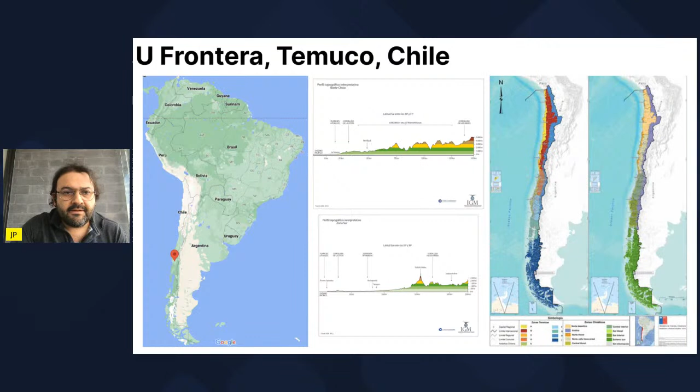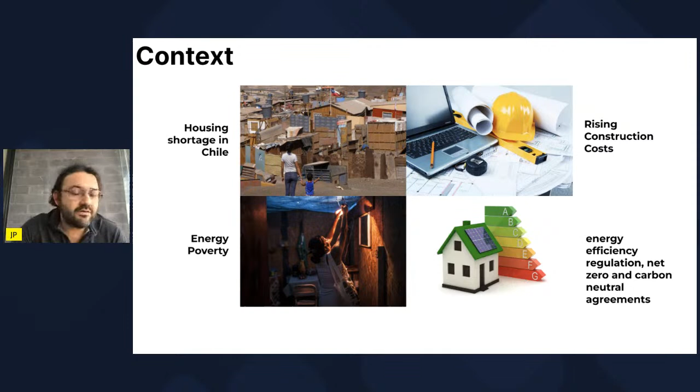Here, as a general context, we have several problems associated with the residential sector, such as the housing shortage, the rising cost of construction materials, and the problem similar to other countries with energy poverty, which must be combined with new energy efficiency standards and some agreements that the country has made regarding net zero and carbon neutrality.

So our proposed solution in this context is our approach has been to move towards industrialization by making use of digital manufacturing, but with a focus on low environmental impact systems and materials. Using our experience in the development of insulation materials with low environmental impact, and the use of vernacular construction techniques, but in a context of digitalization of construction 4.0, you know, sustainable construction 4.0. That is the mix of these two big concepts.

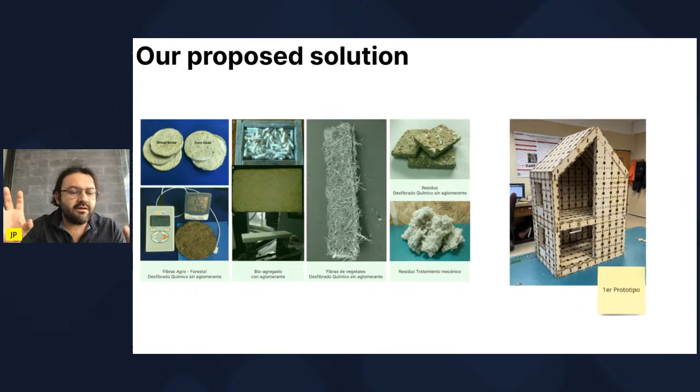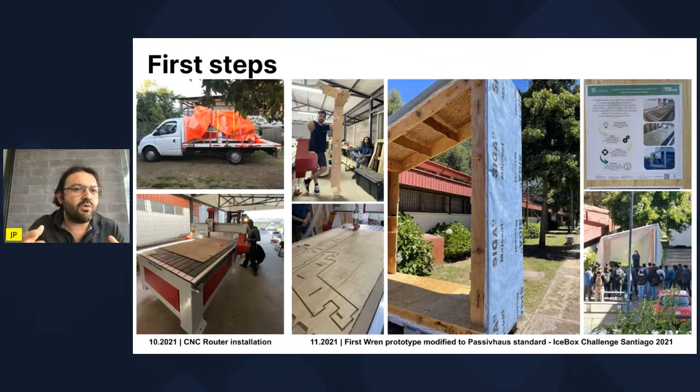So our first steps, a little over a year ago, we bought a generic CNC router, and our first experience with WikiHouse was a section of the Wren system that we modified to comply with the U-value of the passive house standard. This was in the context of the Santiago Icebox Challenge in 2021. Here you can see the pictures, the module, the blocks, and we use this module at real scale for students to show what is this mix of these big concepts.

We found the Wren system very interesting. However, we found that it didn't make good use of the plywood boards, leaving a lot of waste. For this reason, we began to experiment with the development of a system that would make the best use of the plywood board. In addition, due to cost issues, we tried to combine OSB and plywood boards. Everything was working very well, but the joints were an issue that we needed to study in more detail.

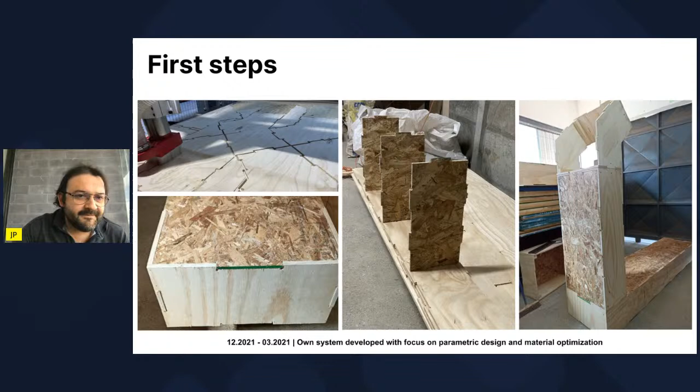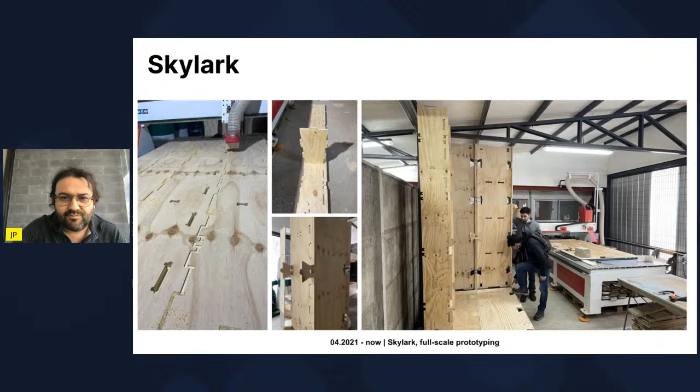At that point, I went back to the WikiHouse workspace in Slack, and I discovered Skylark. This was in April of 2021. So we got the first wall, and we paused our development to start with Skylark. In parallel, we made the first scale model of a prototype of a small house to study each of the parts of the system and study the joints. That was our principal problem in the other system. So we needed to know how this kind of joint works in the Skylark system.

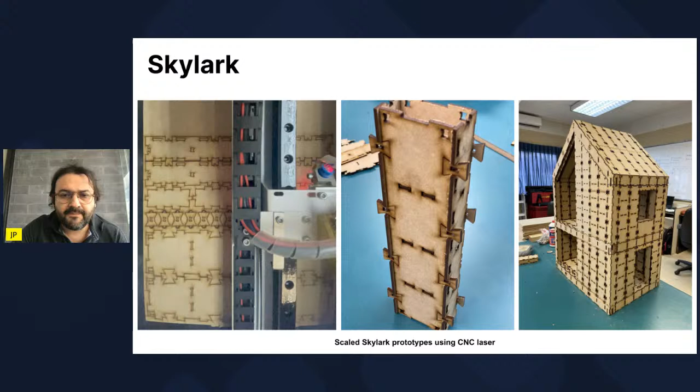We quickly established a workflow using hygrothermal performance and design tools such as AutoCAD, NC Viewer to review the NC code for the machine, Fusion, SketchUp, and Rhino. And we started looking for funding to make our first prototype.

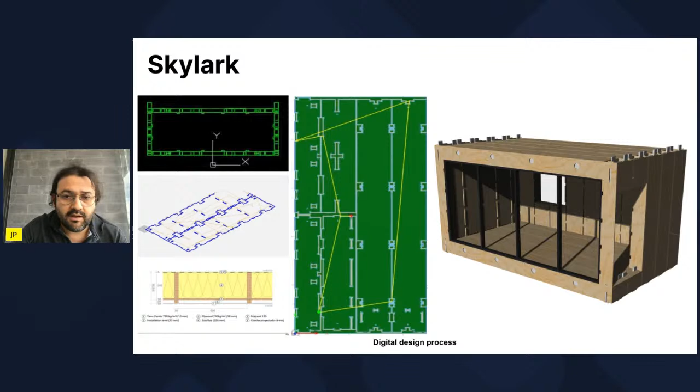The funding we got did not allow us to make the whole prototype, so we simplified and made only the first part as a tiny house. Originally, we wanted to build an office, but finally we turned the project to a tiny house that could eventually grow in a second stage with a second floor. So this was our prototype, and I will show you the details of this first prototype with Skylark in Chile.

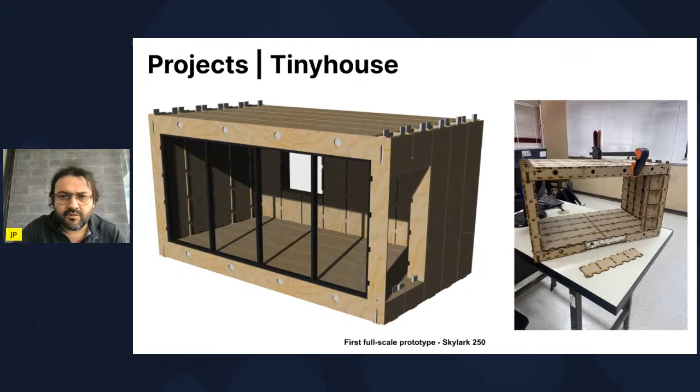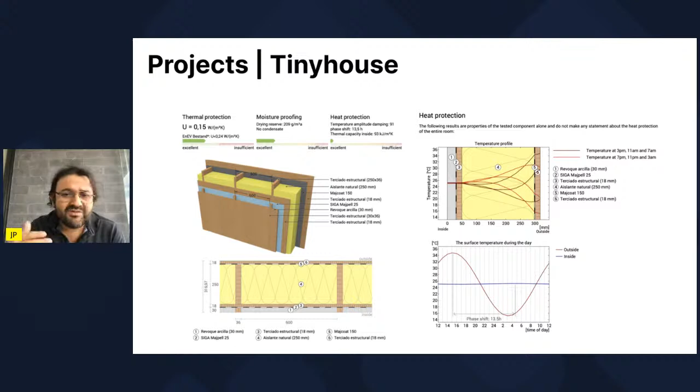Okay, our project includes the use of natural fibers as thermal insulation and the use of clay plaster in the interior, at least in some of the blocks. Once the hydrothermal behavior was checked, we started to manufacture the blocks.

Here, I want to highlight the importance of the company Eagon Lautaro that became our partner and is who now provides us with plywood of very good quality. The first in Latin America to use a bioadhesive, and best of all, its factory is located only 40 kilometers from our city, so it's a very local material, so it's very good for the sustainability that we want.

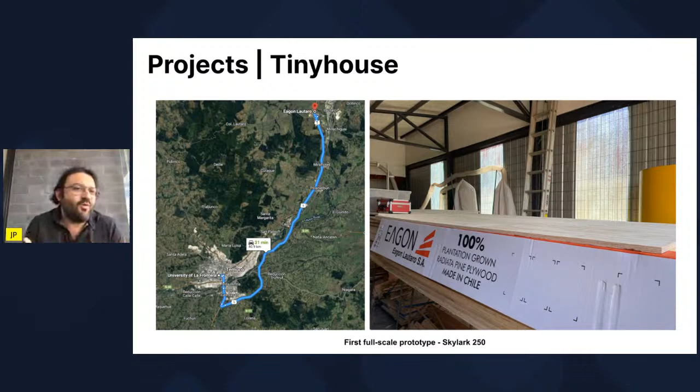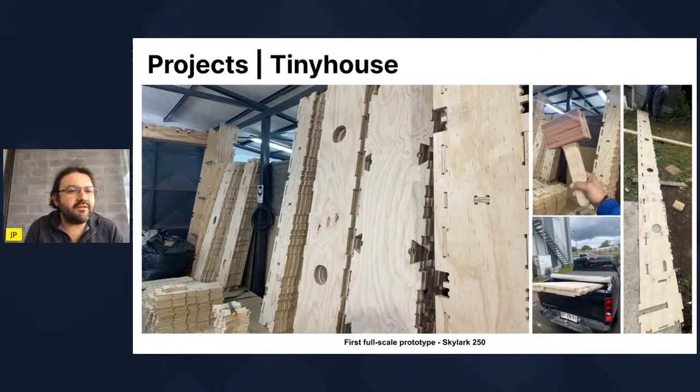In this way, we improve the quality of the parts and the performance in the manufacturing stage, because we use only one provider of the plywood, so it's a very good quality, and we know the difference in the manufacturing stage.

Okay, here you can see some pictures of the location. As you can see, it's located in a small backyard, typical of local homes here. And also some pictures of the process. Since we only made the first part of the prototype, we made a terrace that can later be removed to make the second floor.

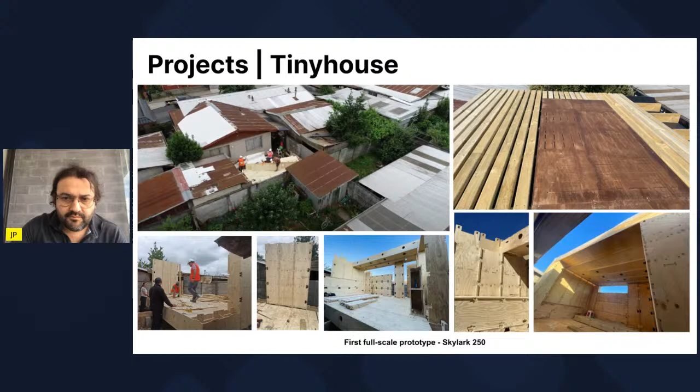In addition to documenting the process, we work around the prototype in undergrad and grad classes. Here, for example, you can see in the picture a passive house class visit. And I have two short videos of the construction process.

Mel, if you can help me to show, yeah, thank you.

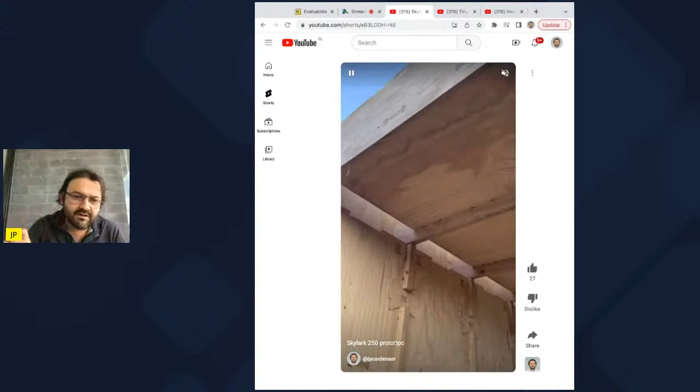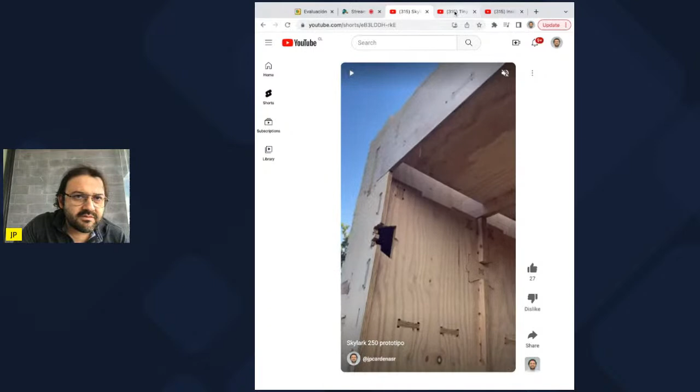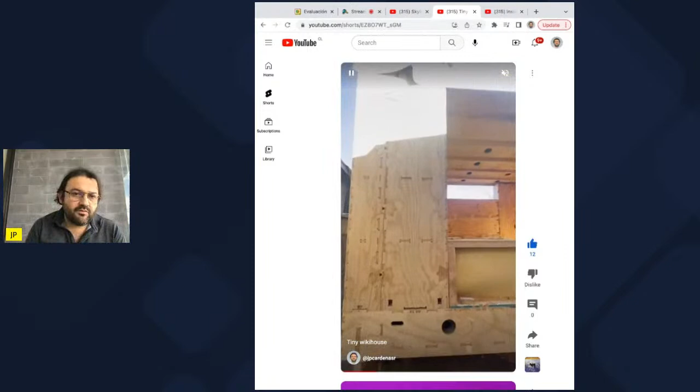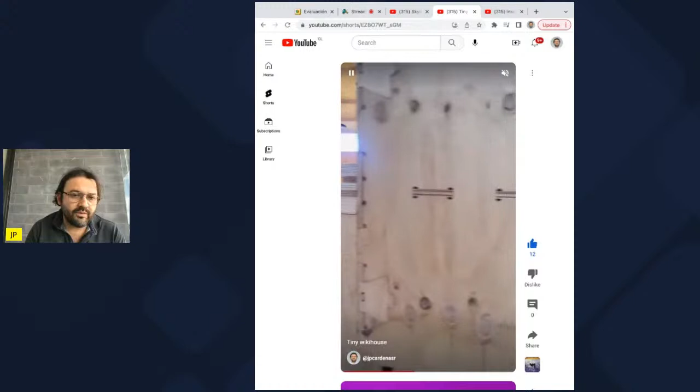This is the first short video in the middle of the stage of building. And let me pause this. And the second video is when we complete all the walls. We made some changes. For example, for windows, I'm going to explain a detail for windows, and put another orientation of the walls as a kind of solution for the windows size.

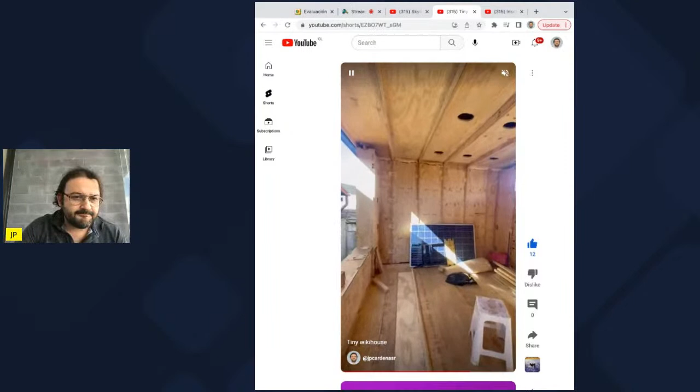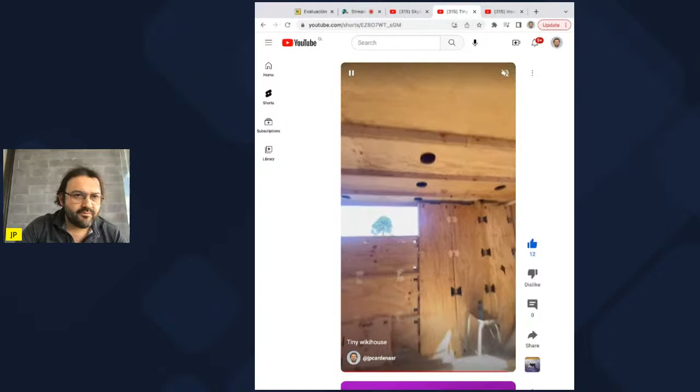Okay. I would like to explain briefly three modifications we have made. Since we decided not to use end and corner blocks, we modified a part of the wall to join at the corners. You can see that in the first picture. And we also generate some T pieces to restrain the edge blocks, because we have to join this wall with the floor directly, not with the end blocks. So we put a T piece here and restrain this movement.

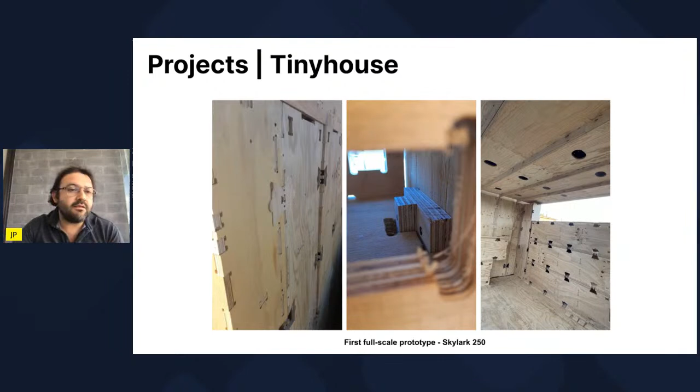And on the side, we replace the windows block by a horizontal arrangement of the wall blocks to generate windows in the space in the four blocks. In addition, these will be the blocks where we will finish with a clay plaster, all the blocks horizontal in the project. Here you can see how the window is looking with a frame also made of plywood.

Okay, next steps will be the insulation by blowing method. The thermal insulation, which will be made of natural fibers by blowing techniques, similar to cellulose blowing method. Anyway, for those who do not know the process, I have a short video here. Here we have a short video where you can see the process.

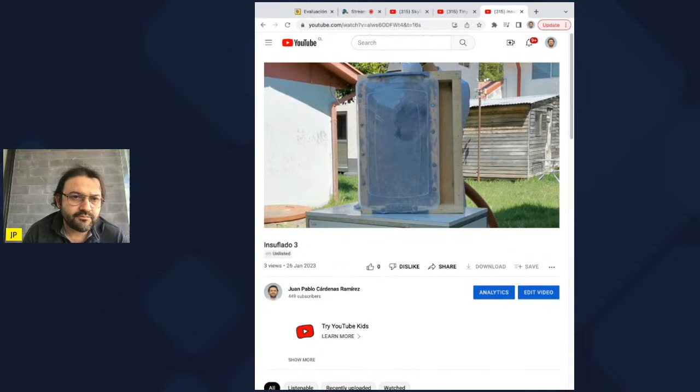The important thing with this technique is that we can reach the optimum densities for the proper use of this type of insulation made from agricultural fibers and residual fibers. So you can see in the video that the force of the air in the blowing method lets us reach a density around 100 kilograms per cubic meter. Okay.

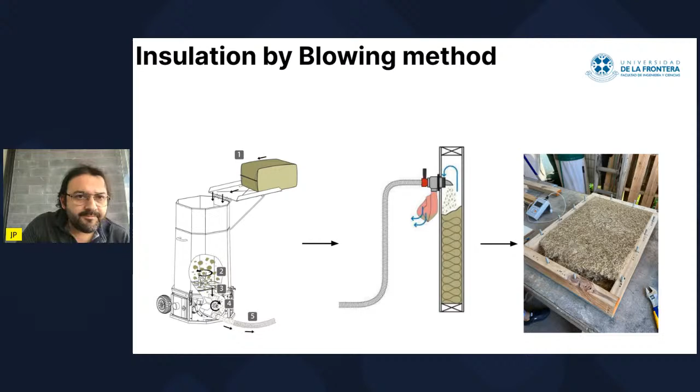And another next step is to install the clay plaster for interior finish. So we have already done the test for the clay plaster and expect to install them in the next weeks along with the installation of the interior plasterboard in the other wall and ceiling blocks.

Finally, I want to show some other activities or other projects in which we have worked. The first was in the context of the ModHabitar competition. We were not winners, unfortunately, but you can see the versatility of the system. Here, our proposal was a one-story social housing that could be extended to a second floor. It was designed for the northern part of the country, in the desert. That is the name, Casa del Desierto.

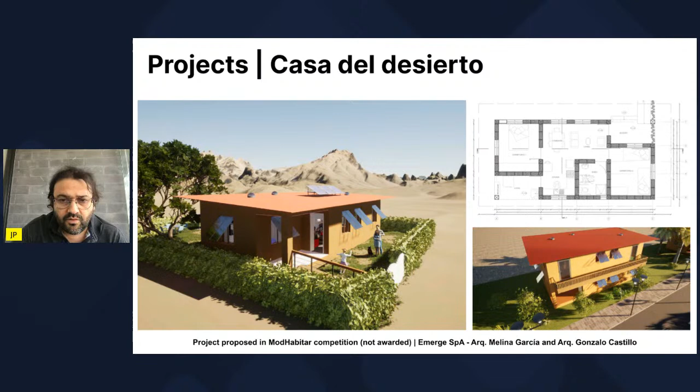And with the energy efficiency strategies we used, we achieved the highest standard in the energy rating for homes in Chile. I have another slide with the details. So it was very interesting how the architects work with the system. And in this project, our material for insulation was recycled clothes, because this is a big problem in the desert of Chile.

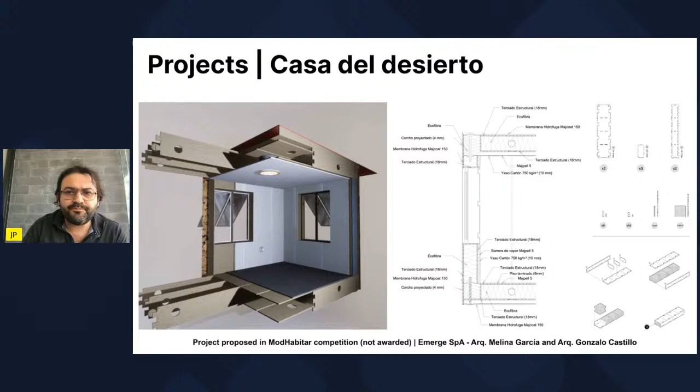I have another activity that I think was very interesting. This activity was a workshop with 30 kids between 10 and 12 years old, where we built a model of Casa del Desierto, the last project, and showed them the process of cutting with CNC laser and CNC router. This was maybe 2 weeks ago, and it was very, very interesting to see the reaction of the kids.

And the last one is another project, one that has just started. It is our first project in Skylark 200. It is already in the manufacturing process, and we hope to have the chassis assembled by the end of February. So maybe I can show more of this project in our YouTube channels or in another activity.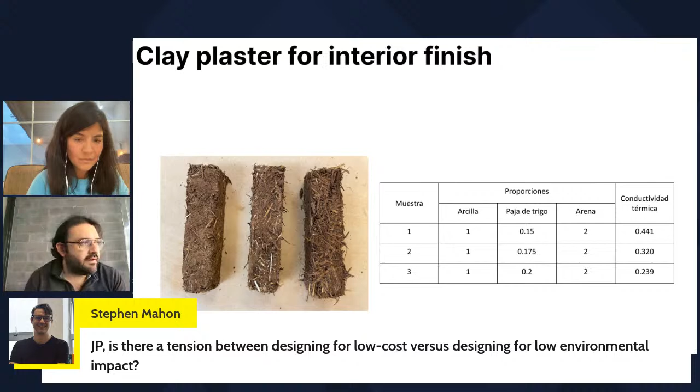There's a question from Stephen here. Is there a tension between designing for low cost versus designing for low environmental impact? Yes, maybe if you go to the commercial solutions, I think it is very clear. But when you try to use this kind of materials, for example, we are using residual fibers. We are trying to use techniques like blowing that is very fast to put all the insulation in the modules. So you can reduce the cost in times, not quality cost, and this reduction of cost you can put in, for example, more insulation.

So we are in the very competitive cost of the square meter. We don't have the final cost of this prototype, but we are in the range of the normal building, but with a very good behavior. That's brilliant. That's really good. I look forward to hearing about it once you put all your numbers together, if you want to share that with us later, because it would be really interesting to find out.

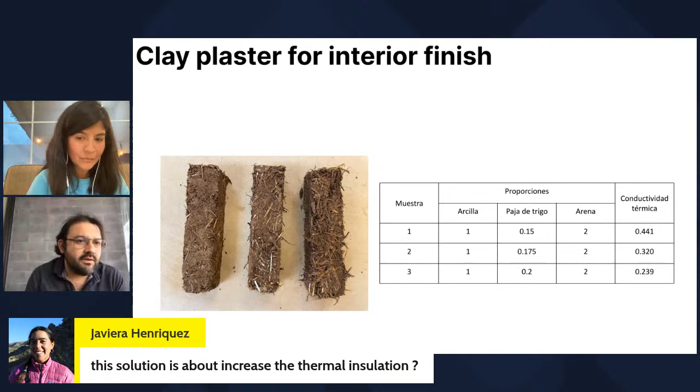I think there's a question from Javiera about this slide, about the clay plaster. Is it about increasing the thermal insulation? Does that help? Yeah. We were looking for a system where, because when we work with normal timber structures, it's difficult to grow 5 or 6 inch, for example, of wood. So we were looking for a system that we can increase the width of the insulation with no linear cost. For example, in the WikiHouse, if you analyze the system, when you increase the width, it's not very important because you have these two parts. So it's not the most important part of the complete wall.

So yeah, from our point of view, we were looking for a system that we can put a lot of insulation, and then you can go to net zero or other highest behavior system.

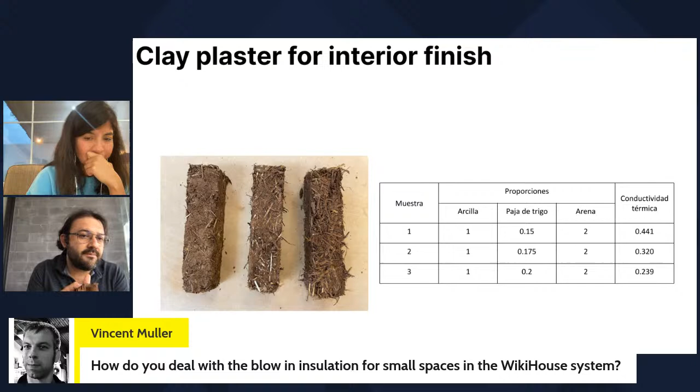Yeah, that makes sense. There's actually another question on insulation from Vincent. How do you deal with the blow-in insulation for small spaces in the WikiHouse system? I think the question is about the spaces. Okay, we are using membranes, exterior and interior, because one of the things of the hygrothermal behavior of the wall is that since you have two layers of plywood, for our climatic conditions, we have to use a vapor barrier. So we use a layer inside and outside, and we can blow in the insulation next.

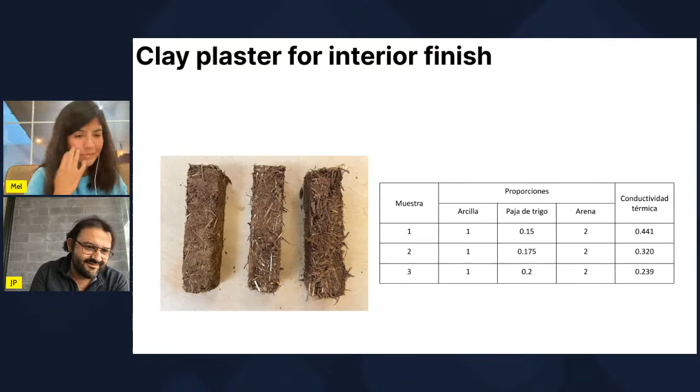Thanks for that. I have another question around your plans. We briefly mentioned some structural testing. Is that the next step for Skylark in Chile? Yeah, a lot of things. I am moving from one university to another in March. So my next plans are to work with a robot arm during this year, and we are looking for funding to do the testing in Chile: fire behavior, structural testing, and maybe sound behavior, other tests to use this system as a normal system in Chile.

That's exciting. And just one final question, because we're about to run out of time. Did you say that your wood is only coming from 40 kilometers away? Is that where the pine is from? No, the pine is in forests around this region, maybe 200 kilometers, but the factory and all the process are within 40 kilometers of our city. That's brilliant. That's super impressive that you found something so close in such a massive country.